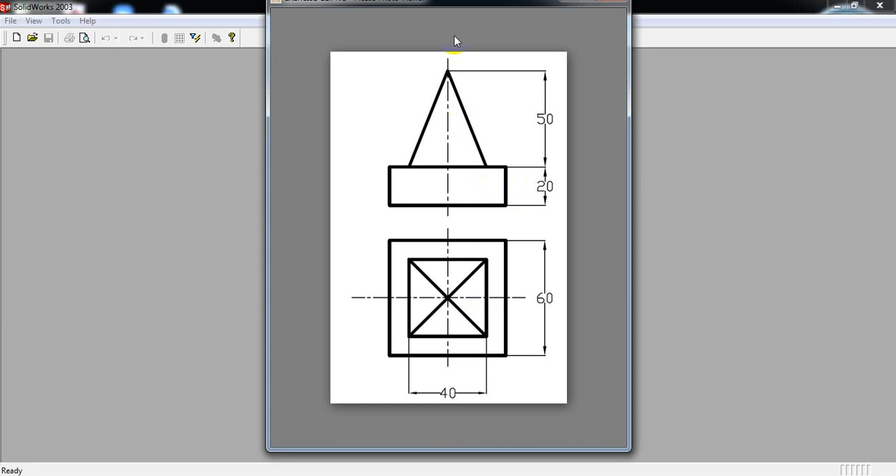Here he has given front and top view, orthographic projections. From this we have to convert 2D into 3D, means orthographic to isometric. Let's see how we can do this. Select file, new, select part file and select OK.

See, this is the top view and this is the front view. Total height of the part is, in front view we can observe 20 plus 50, total height is 70. In top view we can see two squares, one square and this is one more square, having side of 60 and 40. Here you can see the base, and this 60 mm square.

So the base is a square with a height of 20 mm, and inside we can see one more square of side 40 mm. But in front view it is looking like a cone, but in top view we can see it is like a square joined by two diagonal lines, meaning it's in the shape of a pyramid. It will be in the shape of a pyramid. Okay, now let's see how to do this.

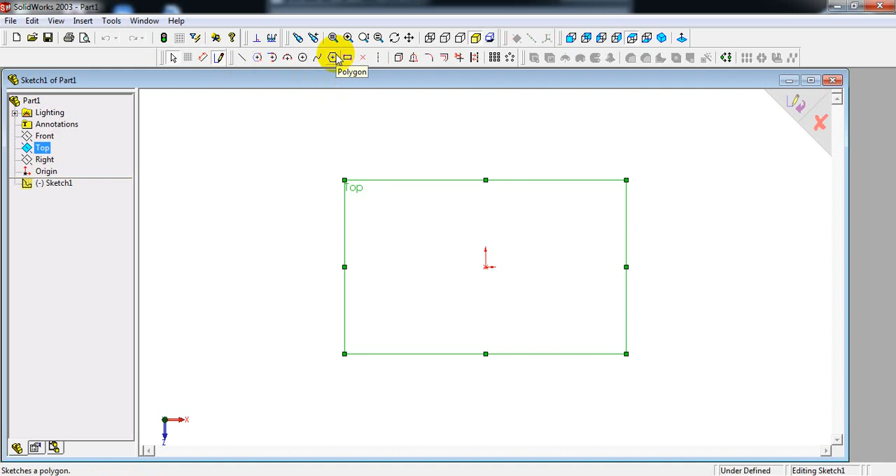Select top plane, top view, sketch, select polygon command. Here we can see a square on the top with the side of 60 mm. In parameter, enter number of sides as 4. From the origin point, draw one polygon.

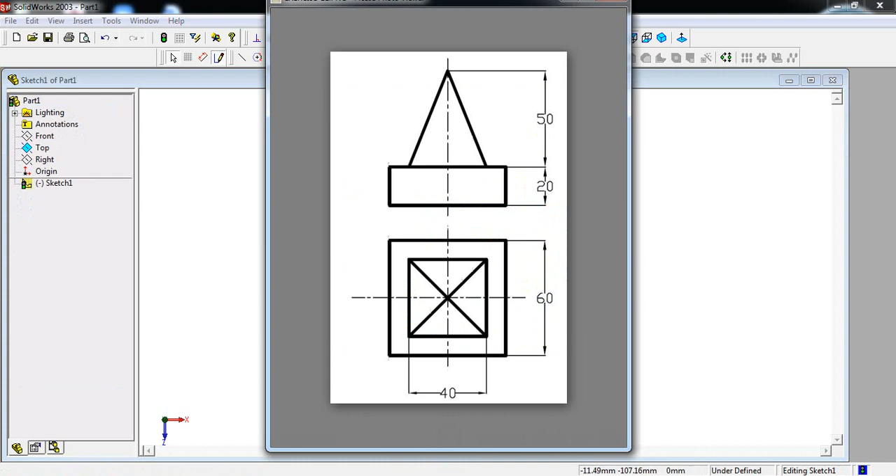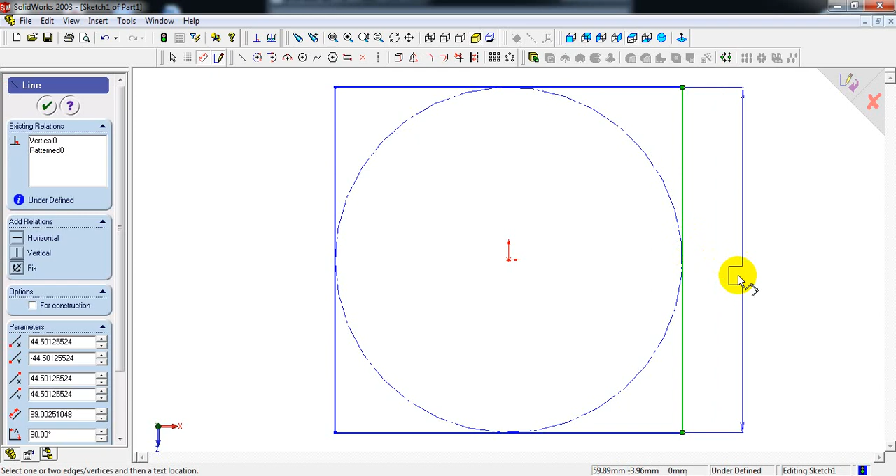Select. Now we have to give a relation for this, any one of the sides. This is a top view. The line is horizontal and vertical, meaning it is placed exactly. So select any one of these sides, give the relation as vertical or horizontal. Now make dimension, it is 60 mm, side is 60 mm, enter 60.

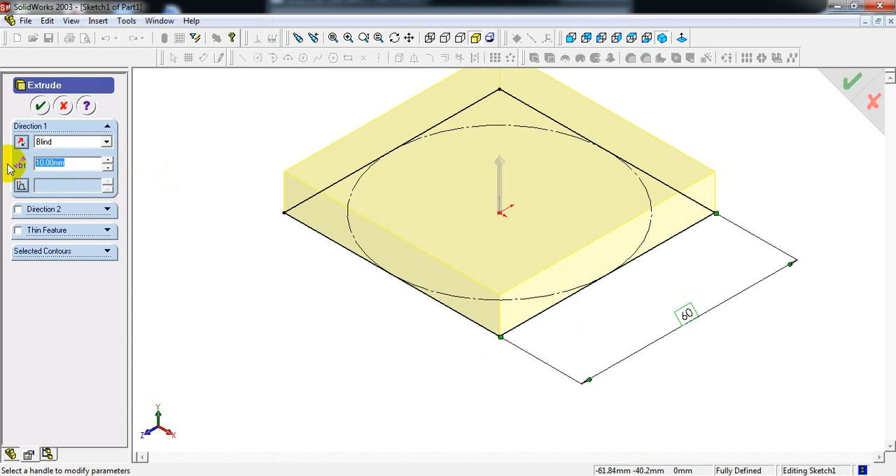Now select isometric view, extruded boss base command. We can see it is projected up to a height of 20 mm. Extrude 20 and select OK.

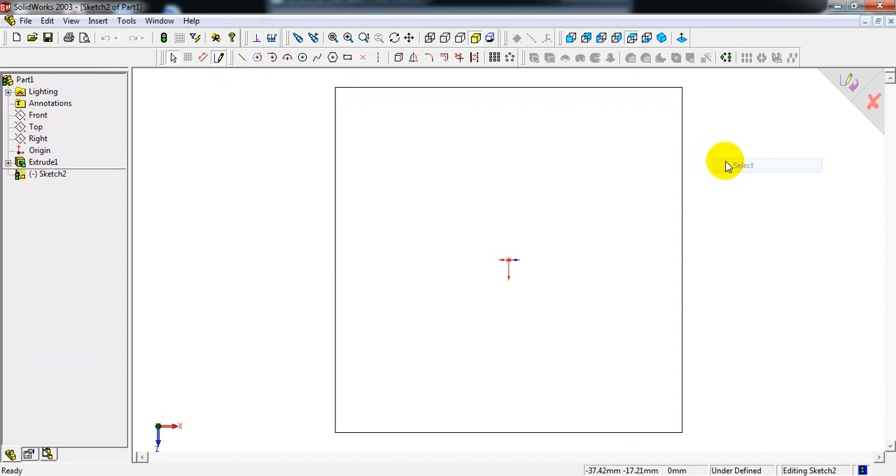Now again select top face, top view, repeat the same commands. Select sketch, select polygon, because here we have to draw one more square on the top of this base. Select polygon, number of sides is 4 because it is a square. From the origin point, draw one more square. Select, make any one of the sides

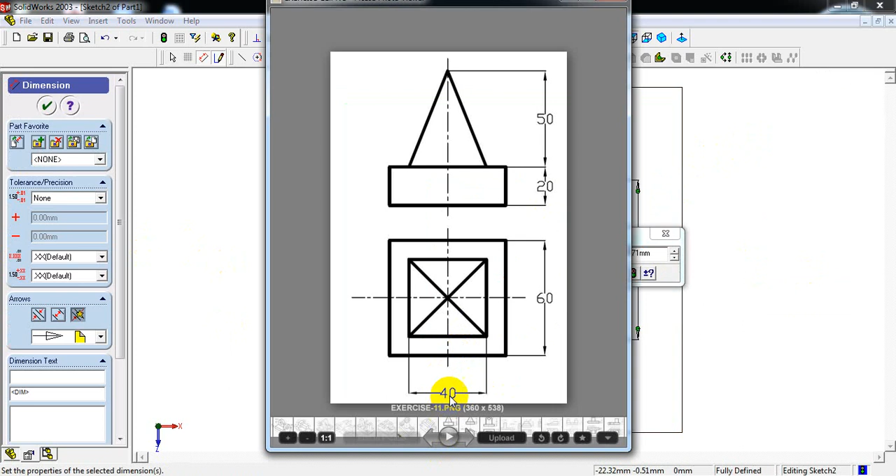add relation as vertical or horizontal. Make dimension as shown in the figure. It is 40 mm, square is 40 mm. Enter 40. Now select isometric view, extruded boss base. How much has it been extruded? It is extruded at a height of 50 mm. Enter 50. Okay.

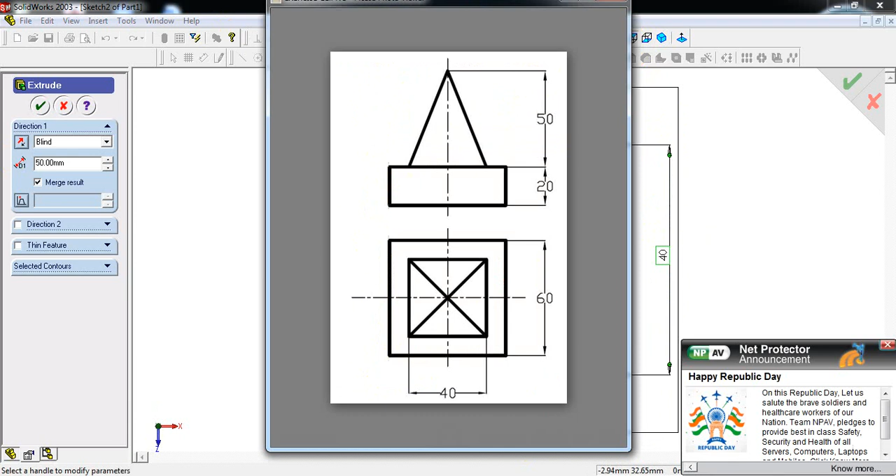Please observe here. Here in top face it is not looking in this way. Okay, here you can see two diagonal lines in the top view, but here you can't see because it is not a pyramid, it is just a square. And in the front view you can see one more rectangle on the top of this base, but here it should be in the shape of a cone, inverted cone.

How to do this? In extruded base we have one more command here. We have to give height. What is the height? Height is 50 mm, followed by, here you can see draft on/off. We have to turn on the draft. Here you can see 1 degree.

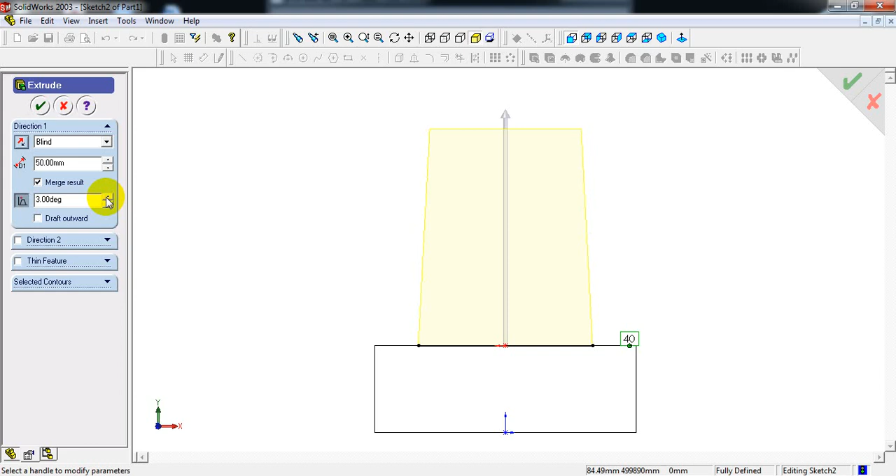When we increase the angle, you can see the changes. It is forming into a pyramid shape. We have to give for a height of 50 mm, 21.8 degrees. Note down 21.8 degrees. Select OK.

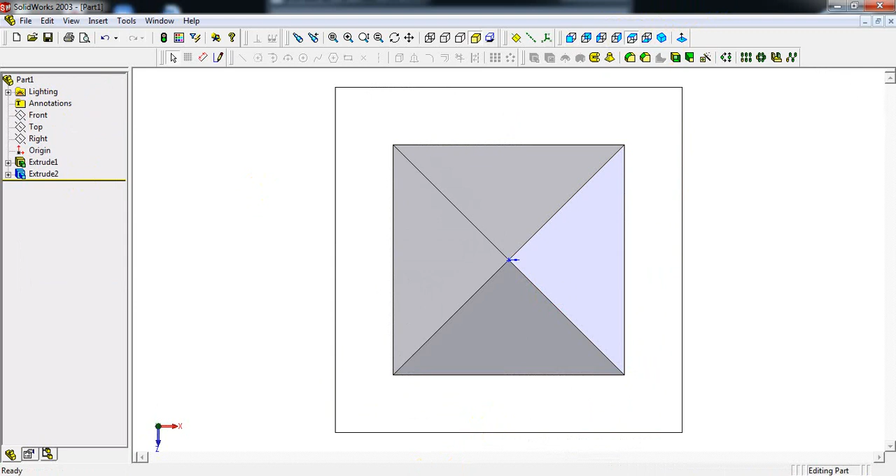See, this is the top view. In top view it is looking like this. It is the front view. So this is the front view.

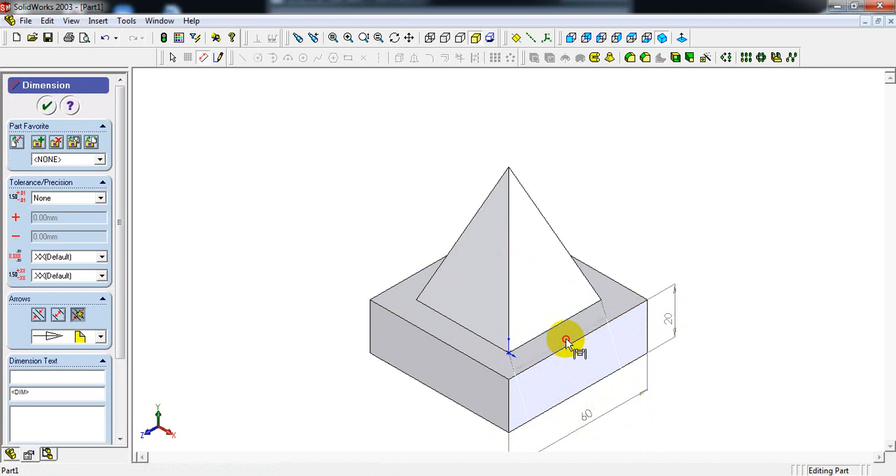Now make the dimension for this. Select dimension. Here base height is 20 mm. This base square is 60, and this is 40, and one more dimension is the height of the pyramid.

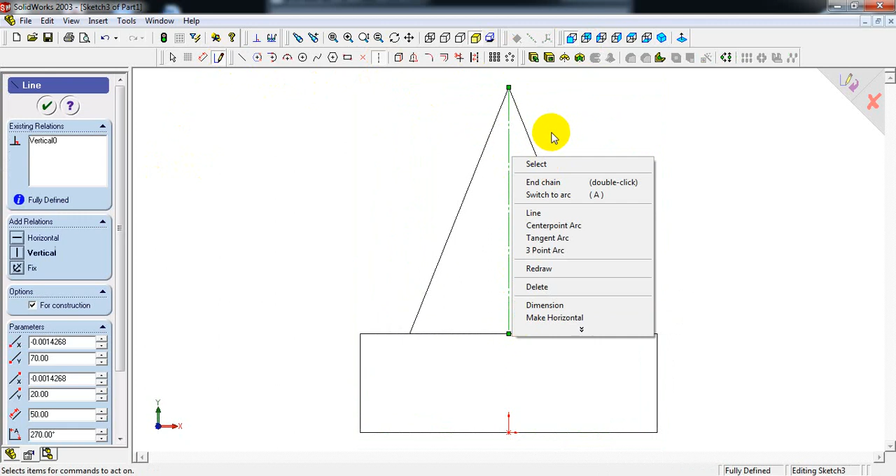In order to dimension the height of the pyramid, select front plane, front view, sketch, select center line command. From this top tip, select up to this base exact center point. Select. Now here select the confirmation corner, confirm. Isometric view, select dimension, do the dimension for this axis line or center line. It is given as 50 mm. Okay.